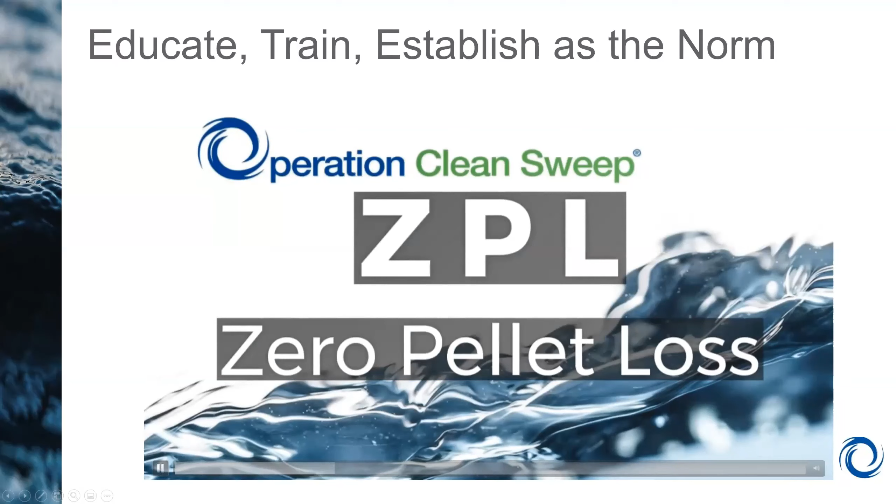This first video, we've got TVs and monitors throughout all of our facilities, and this shows the employees how we address pellets, how we address sustainability. We've got almost 400 TVs through our organization. As an Operation Clean Sweep member and OCS Blue member, we promote all of the principles of Operation Clean Sweep. So we're now on this big zero pellet loss initiative in our company. We've always been about containing pellets and everything, but now we love acronyms, so ZPL, and we're pushing that through.

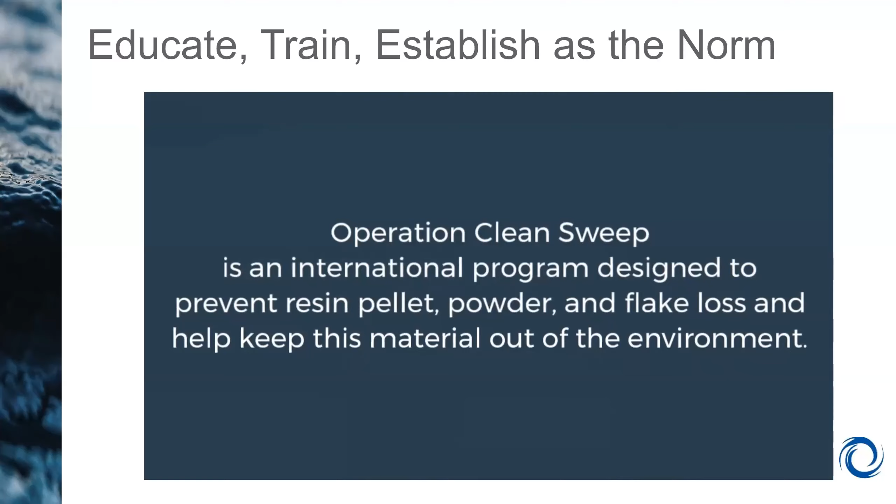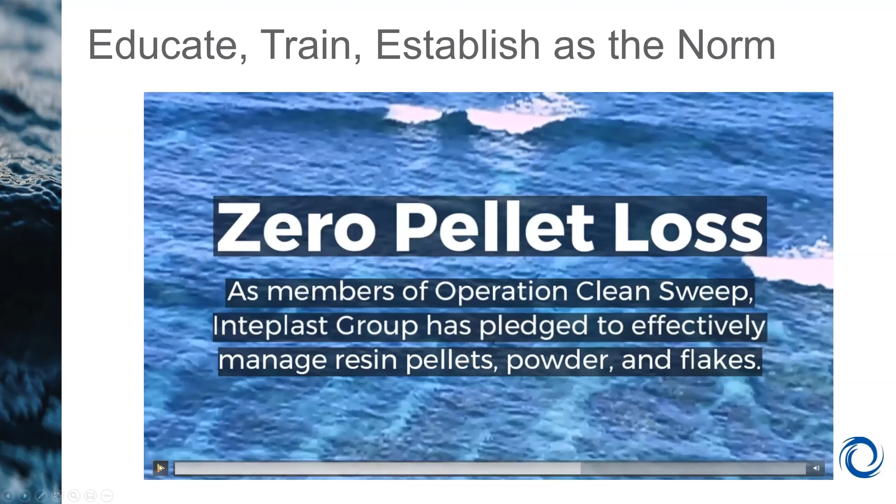This is an easy way for the employees to be exposed to Operation Clean Sweep, to understand that everything should be contained, et cetera. So this was one of our videos, and I'll flip on to the next one.

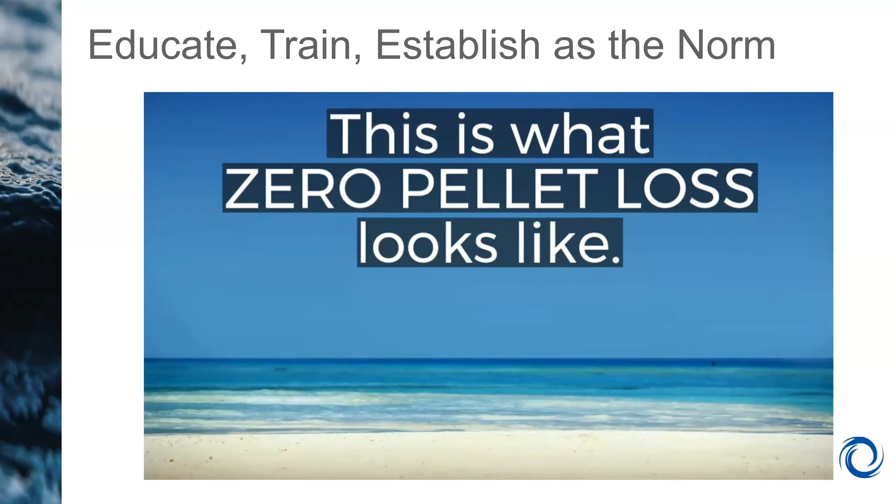This is another one, particularly with all of the issues that are occurring with pellet spills, in the Mississippi just happened, South and North Carolina. There's issues all over the place internationally. This video shows some pleasant scenes of what our beaches, waterways, oceans, what Mother Nature should look like.

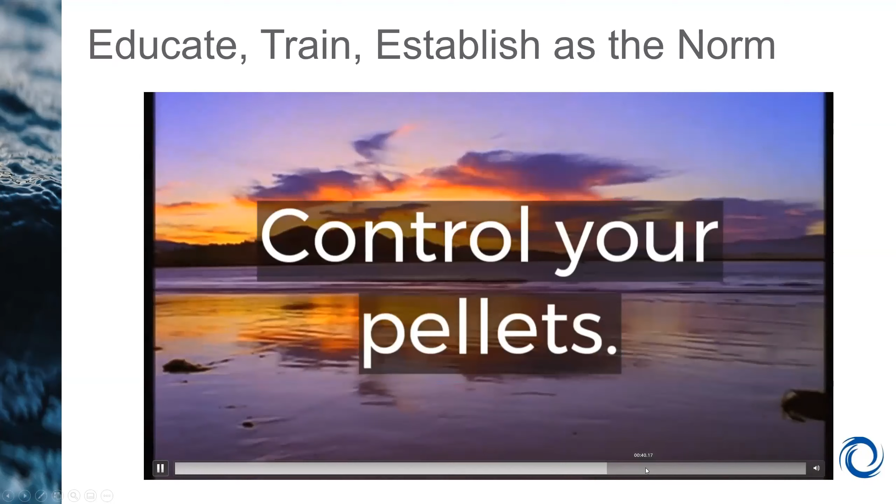And we tie that immediately to the pellet. Are we doing what we're supposed to be doing in terms of managing pellets and managing waste in general, but specifically where we hone in on this concept of zero pellet loss. It runs through and controls your pellets. So zero pellet loss, that's what we're preaching to every single one of our employees.

What's great is from our number one person in our company all the way through to every single employee, over 7,000 strong, they get to see this content. My perspective is we just can't tell an employee, clean up that resin spill, and expect them to do it. It needs to be a constant message, and they need to understand why the pellet should be cleaned up.

So we even put PowerPoints up for our employees. Why strive for zero pellet, flake, and powder loss? It's good for the environment, it is the law, and it promotes safety and saves costs. There's some really no-brainer reasons why we want to go this direction.

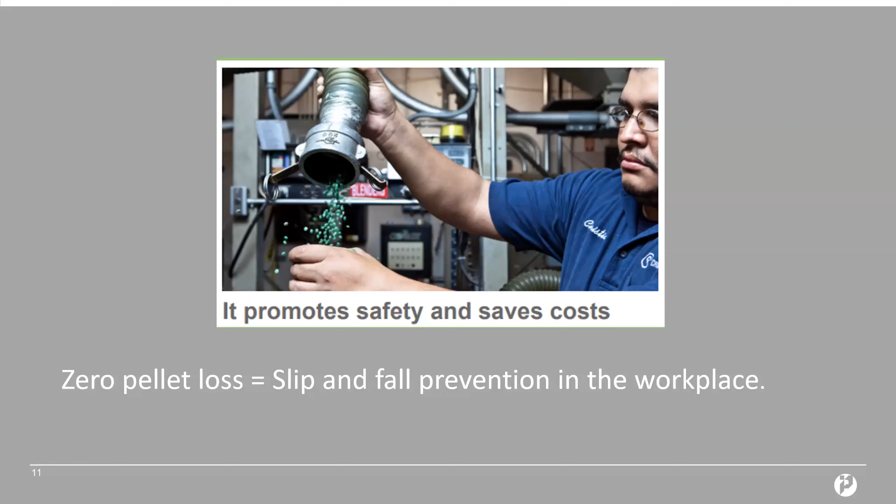So even for safety, from a slip and fall prevention standpoint - when you're doing the right thing with pellets, you're taking care of your assets, you're taking care of the environment, you're taking care of your employees, you're addressing safety. There's literally no reason why an organization would push back against a program that promotes pellet control. So anyway, we put that information up there.

I wanted to set the tone with that information and encourage everyone listening and watching this presentation to first set the culture. Everybody's familiar with safety culture or business culture, but there is a sustainability culture. And drilling down a little bit further, there's a pellet culture, and you literally have to establish that pellet culture, particularly as everything changes right now.

The pellet was not viewed in such a detailed manner as it is today. For many years, it was wherever the pellet was internationally. Now you see the spills that have occurred and the attention, even moving to zero pellets on stormwater and wastewater and everything. This is really, really important stuff, and everybody's got to establish that tone first, then start drilling down and establishing procedures.

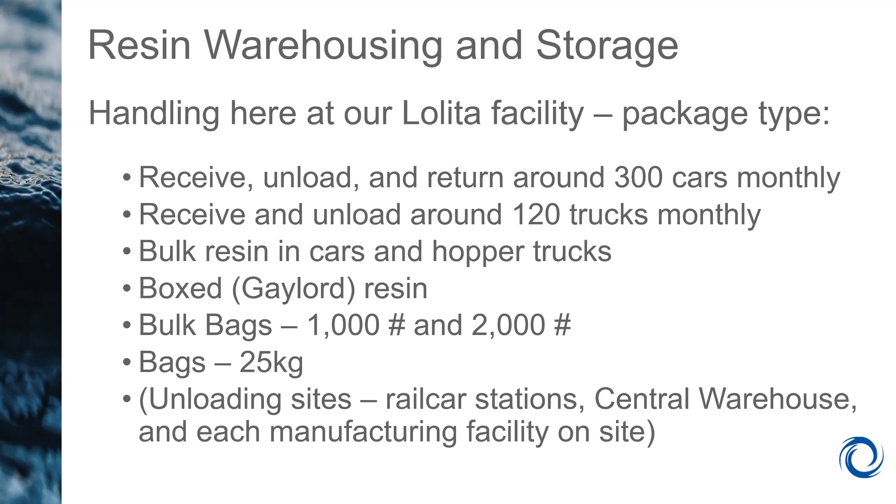The bulk bags are multiple sizes. This slide is just to let you know that you need to understand how to treat each one of these instances differently so that you don't wind up with a situation with pellets. The blanket over all of this is that zero pellet loss is the mantra. Zero pellet loss. That really helps us as we go along.

Our storage methods: around 10 storage facilities, well over 100 silos. We've got conventional racking, which produces some issues for pellet storage. And then also automated warehouse storage, which is an animal unto itself, because if your Gaylord or your bag isn't set up properly, you're going to have a complete disaster in the automated warehouse. It's computer controlled, robots, et cetera. And if you've got a leaking bag or a leaking box, there aren't necessarily any eyes on it. So there are many principles you have to establish even for automated warehouse storage.

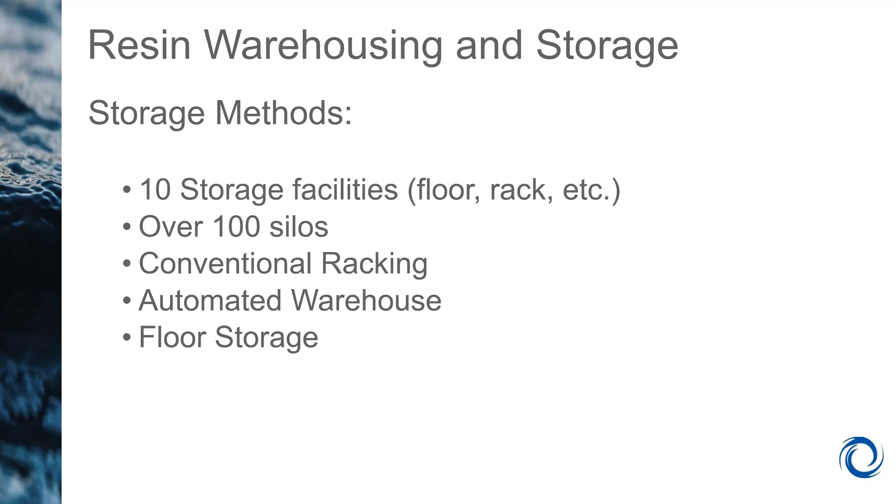And then we've got good old floor storage. Everybody has it. A lot of times we take floor storage as no big deal, like just put 40,000 pounds over here and stack it however. We don't do that anymore. There is a science, there is a method we've got to follow, even for floor storage. You'd think just go throw in double stacks and call it good, but we'll cover a little bit of that. Those are our storage methods.

So our handling or unloading of resin at any point in time—what I love is that in many ways we don't treat it differently than any other item that central warehouse or material control handles. We still apply the same concepts, because what's important to resin is important to everything else. Whether it's motors, earplugs, cleaning supplies, whatever it might be, we've got 15,000 line items in stock. Whatever the item might be, we have these basic principles that just carry right over automatically to resin. It's a pretty commonsensical approach to take.

So of course you handle it safely. Never would we want to do or have an employee do anything unsafe. Whether that's a 1,000-pound motor or a 1,000-pound box of resin, we apply all of our safety principles to it. And we don't damage things. Can you imagine if we brought in that motor and dropped it or put the fork right through it? That's an asset, and we just can't be wasting money like that. So it's the same principle.

We take care of a box or a bag or a rail car of resin, and it's fully accounted for. So if the vendor says there were 5 motors on that pallet and here's your packing slip, we treat the motors—which could be $10,000 motors—equally as a pound of resin that can go anywhere from 40 cents to $10 a pound, depending on what it is. We treat it the same exact way, where it's always fully accounted for, locations, in good shape, and we've got control measures in place for quality.

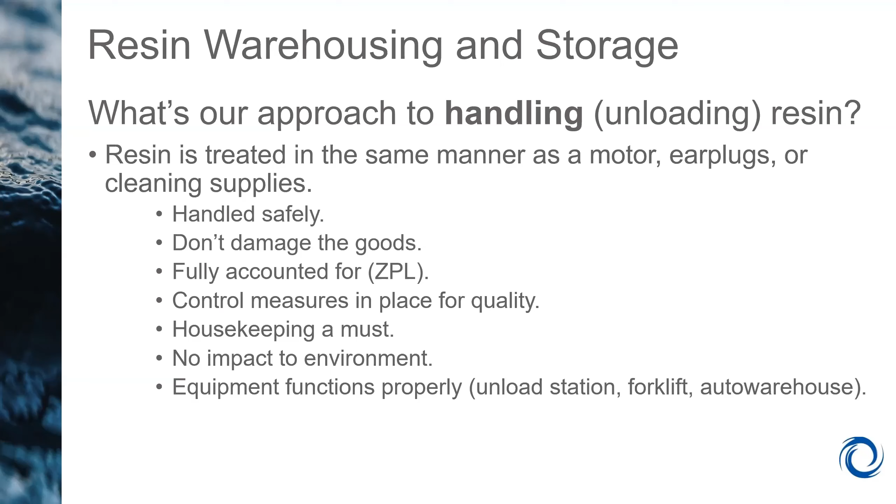So again, through this webinar, this opportunity, I'm trying to really hammer home that it's a culture. And on top of that culture, we treat resin in a very careful way, just like everything else we do. By applying those principles, we wind up with a pretty good program for handling resin.

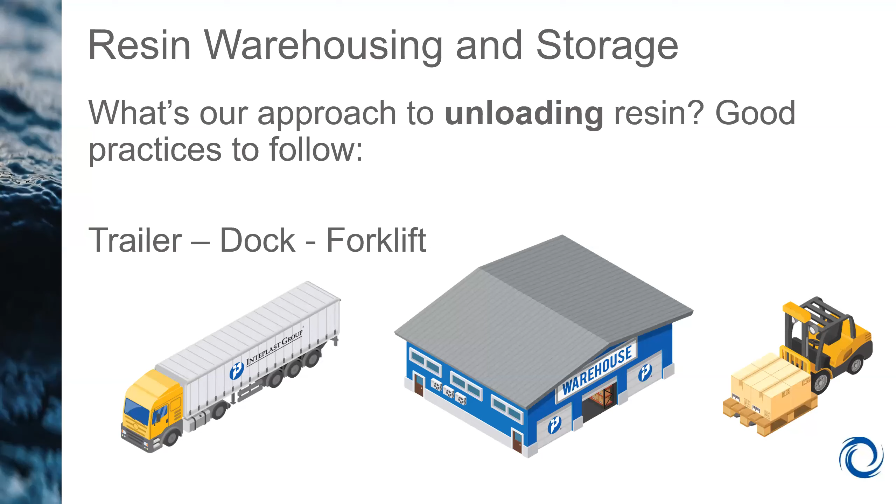So everybody has the traditional trailer dock and forklift setup, and we're going to look at that a little bit. Sometimes trailers will be backed up and we'll open up the doors, and we've got bags that are already leaning against the doors - a near major incident. So use caution when opening trailer doors.

And of course, safety first. Pellet control is obviously incredibly important, but safety first. So just like if we were opening up a trailer full of packaging supplies, we're going to be opening up this trailer that has 1,000-pound boxes that may have shifted during transportation. So be very, very careful about that.

No leaking containers. Obviously, if you've got a leak, don't move it. I would call the carrier, I would call the shipper, see how you can best handle it. If it's something you can manage, go ahead and take care of it.

Make sure you already have your storage location and your plan for how it's going to be stored, because there are two different things - you have storage location, then storage plan. Make sure you have that nailed down while that truck is backing up, or however you're receiving the material, because you don't want to arbitrarily place material anywhere in a facility and then have to move it again. Every time you move something, you're going to have a potential for a spill.

Use the correct equipment to unload. That sounds like a little bit of a silly statement, but I've seen some crazy things over 30 plus years. So use the correct equipment to unload the resin.

Be certain that your forks are set appropriately. I used to drive a forklift - I laugh with my team that I'm still the best forklift operator around, but I've probably lost that touch. I know many forklift operators who don't get off the forklift to examine their forks relative to the spacing on the pallet, and sure enough, before you know it, they break the pallet, the Gaylord winds up with a leak, et cetera.

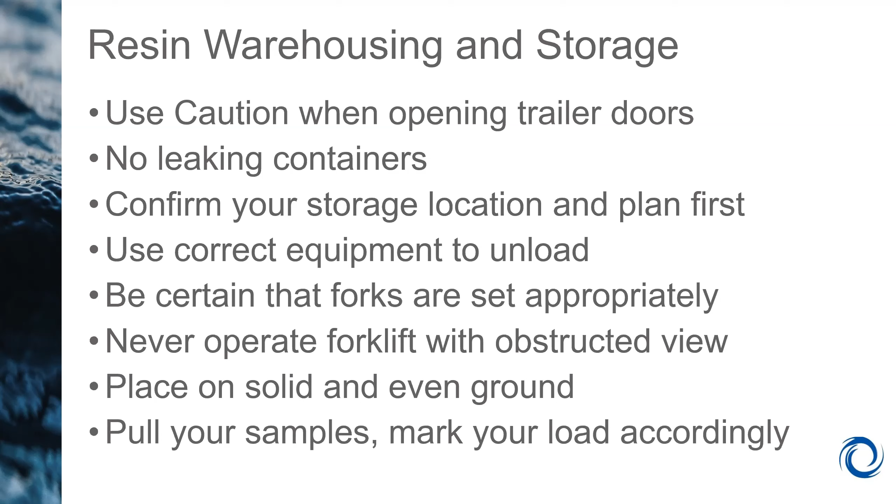Very, very important: never, never operate a forklift with an obstructed view. So if you're handling double stacks or a super sack, everybody should know this principle with forklift operations - if you can't see moving forward with full sight, then you have to go in reverse. That's another topic, but just don't forget that. And then obviously place on solid and even ground, pull your samples, and make sure your load is marked properly.

So for storing resin, a lot of the same thing. We store it just like we store our other commodities, spare parts, and packaging supplies in stock. Handle it safely, make sure it is clearly identified. If you put it up and you can't see the content labels, you've just made a mistake.

Make sure that the containment item is in acceptable condition, whether that's a super sack, 1,000-pound sack, or a Gaylord, whatever it might be. Make sure that the condition of that unit is in good shape. And then make sure that based on the type of material and the particular storage conditions, you're storing it correctly - you've got stacking requirements, rack weights. We've seen instances at some places where rack weights were exceeded. Can't do it with resin.

Make sure nothing is leaking. Because remember, Operation Clean Sweep is no pellet loss. If there's a leak, stop it immediately and then dispose of it properly. So we deploy that principle. Sure, leaks are going to occur, but our team knows, oh no, that's not a good situation - fix it.

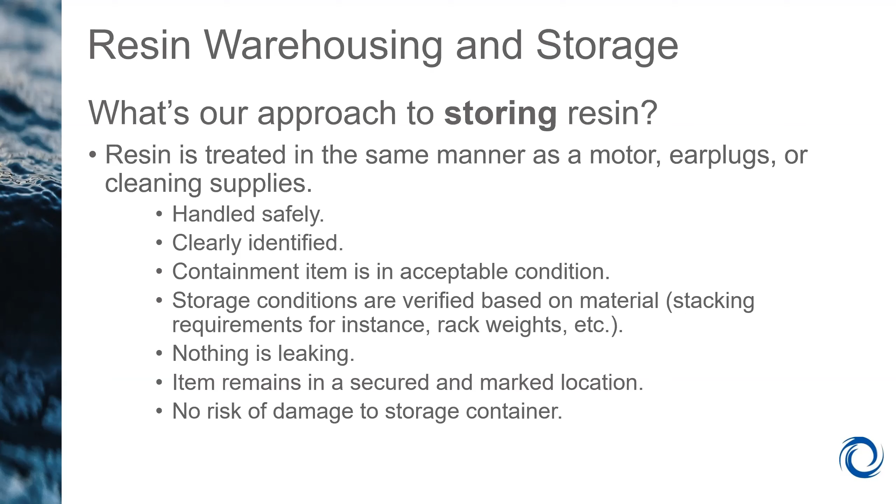And then they fix it, and then they dispose. If we did have any leakage, we will dispose of the resin, or be able to use it as long as it's in good shape. So make sure the items remain in a secured, marked location with no risk of damage to the storage containers.

For floor storage in general, make sure the weather is not a factor. Some folks literally store resin outside. I've seen it at different customer visits, and that is not conducive to a good situation. Particularly, the bags will deteriorate, and the Gaylord boxes will immediately absorb the moisture in the air. They will begin to deteriorate, and before you know it, you'll have a spill. So we strongly advise against any outdoor storage for resin.

Stack according to the packaging instructions. Most vendors will indicate how to stack it. If they don't, you've got to use your best practices in-house. Again, follow all your safety protocol, make sure the load is stable with no chance of leaning. You'll have a massive spill if the top Gaylord falls off the lower one, but you also run a terrible risk from a safety perspective. So be very careful about that.

Leave at least a 2-foot aisle in between the rows of products. I have a little diagram I'll show in a minute. With two rows of product adjacent to each other, leave the aisle space. Don't stack product on the edge of a space where common traffic areas exist. If you have a very high traffic area with personnel or forklifts, don't go close to that with double stacks. You're just asking for trouble, so stay away from that area.

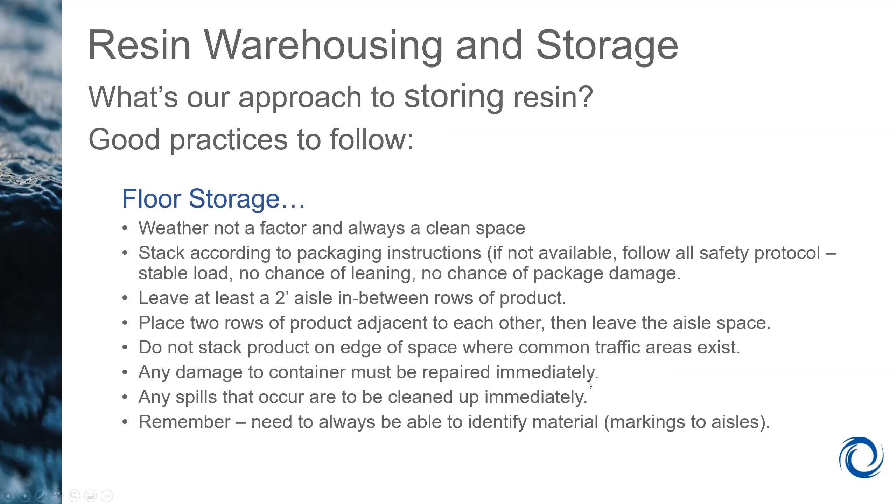Damage to containers must be repaired immediately, no ifs, ands, or buts. Our employees now know that if they see something leaking, they fix it. Any spills we may see are also cleaned up immediately. And remember, always be able to identify the material for easy tracking.

So a very high-level look at this, but this is a typical arrangement we do. If we can pyramid stack, we call it a 2x2+1. You see the little orange dots - that's just indicating where you should have identification markers on your storage units. This is the 2-foot aisle right in between, so as you're taking inventory you have a good 2-foot aisle space, and you can see the markings on all the storage units.

A little bit different is 3x2+2: we'll go 3 on the floor, double stack, and 2 up top. You can do that also, but the same principle applies - leave all your markings on the aisle so that works out okay. Again, do not exceed the storage instructions indicated on the packaging unit.

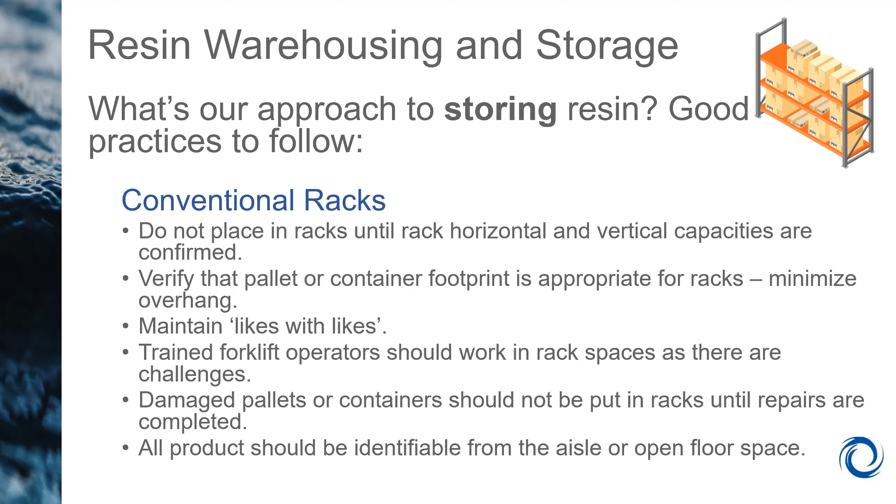Again, obviously, if a pallet is damaged or the container's damaged, don't put it in the rack - make sure it's fixed, then put it up. No problem. And make sure that from the floor space, everything is identifiable, either with your barcode scanner or by the eye, whatever the case is, so that during inventory or when you're hunting down materials, you can find it.

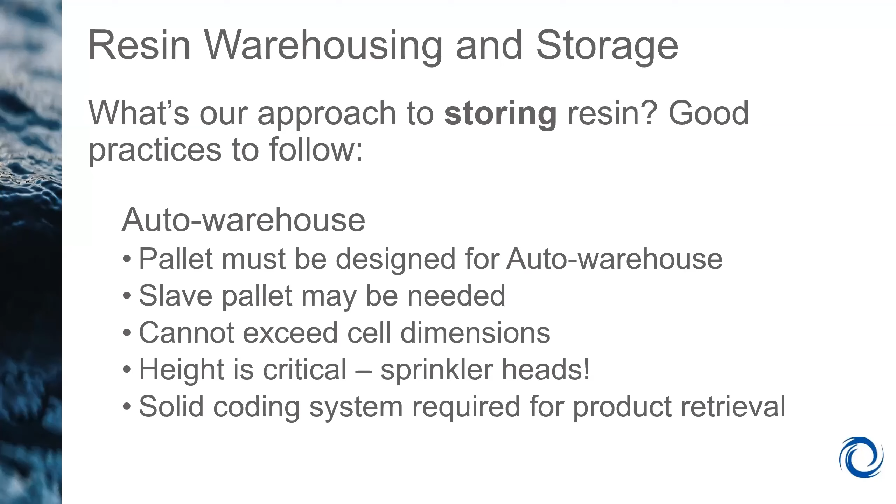We'll move on to the next slide.

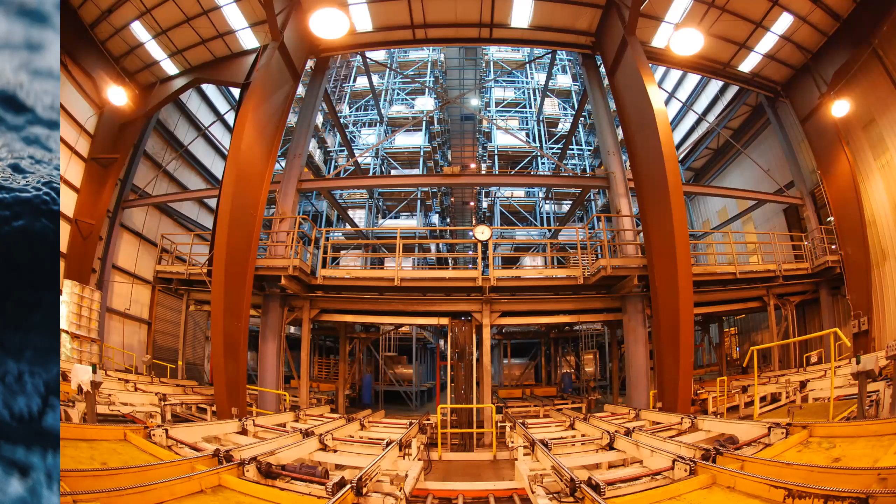For auto warehouse, very similar storage requirements in auto warehouse. This is a pretty cool shot of our auto warehouse with a nice fisheye lens. It's quite a neat experience to work in that auto warehouse, and you can see how high it goes, and we've got robots working in there. So you can imagine if you failed to put up a pallet of goods, whether it be product, resin, or packaging supplies, into that auto warehouse, it needs to be perfect. So hopefully any of you that do have auto warehouses are managing that at point of entry. Don't let a pallet with an issue go into that auto warehouse.

On silos, obviously make sure the right car goes to the right silo. All hoses and equipment must be fully serviceable. We've had an instance or two where the old hose coupling blew out, and that unloading pump still blew some resin, and we had a mess to clean up, no doubt. So stay on top of all your silo related and conveyance equipment, doing routine PMs, changing out couplings, whatever it might be, making sure bolts are tight, etc.

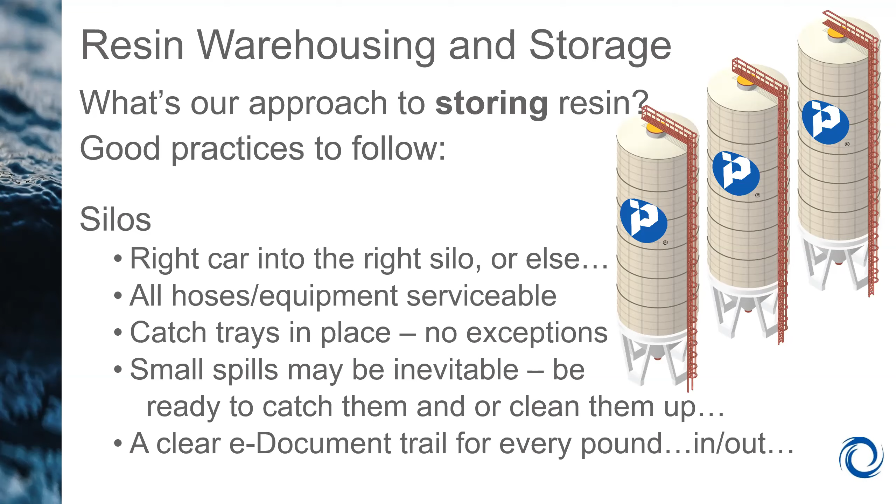And of course at the rail car, it's a different scenario there, but make sure you're using catch pans at the rail car. There's no reason for a pellet to hit the ground. We know that unloading, or connecting and disconnecting hoses, creates an issue or the opportunity for a leak, but make sure you've got that under control. And then with your silos, cone inspections, coupling replacement, filter bag maintenance, and be inspecting your welds. It's very, very important that you stay on top of that.

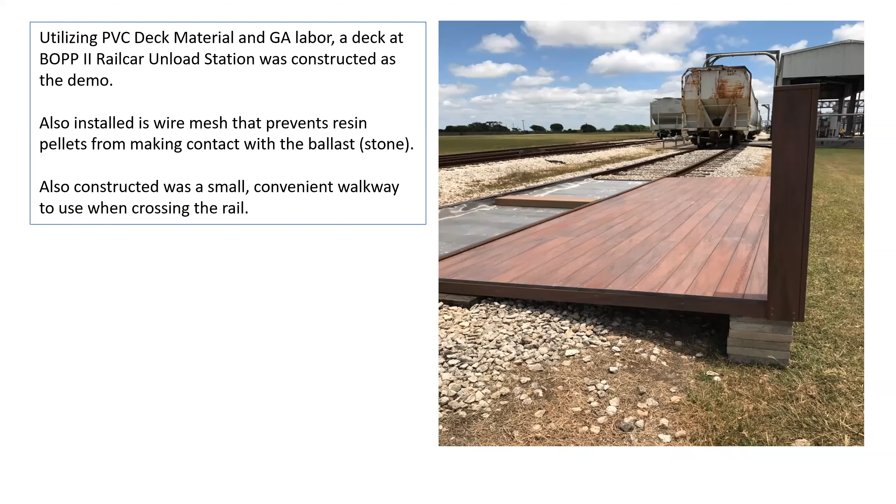This is a little illustration. We did this at some of our unload stations. One of the products that we make is PVC decking. So we built a deck, and that is tongue and groove, so pellets cannot go through it. And then we applied this fine mesh to the track where we'll have an unload. The connection to the car comes over this area. And if we have a spill, not too often, but if the pellets do come loose, we will simply just vacuum them immediately right off of either the stainless steel mesh or the deck. It has worked very well.

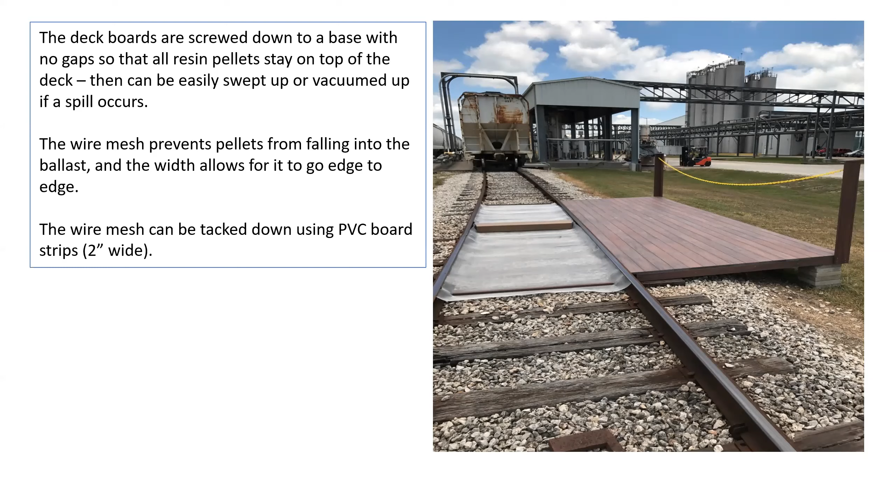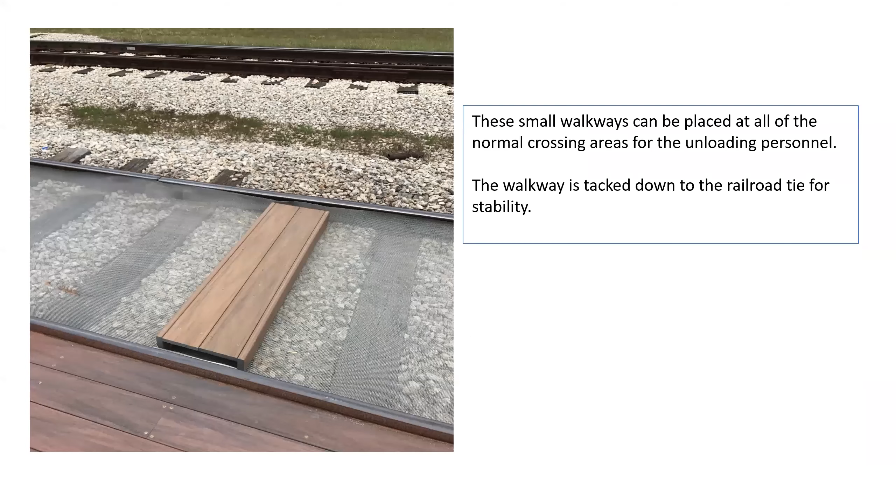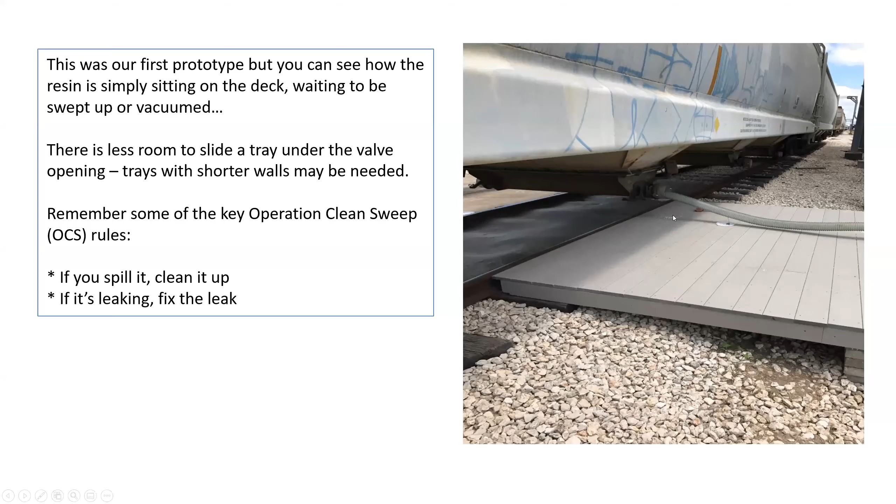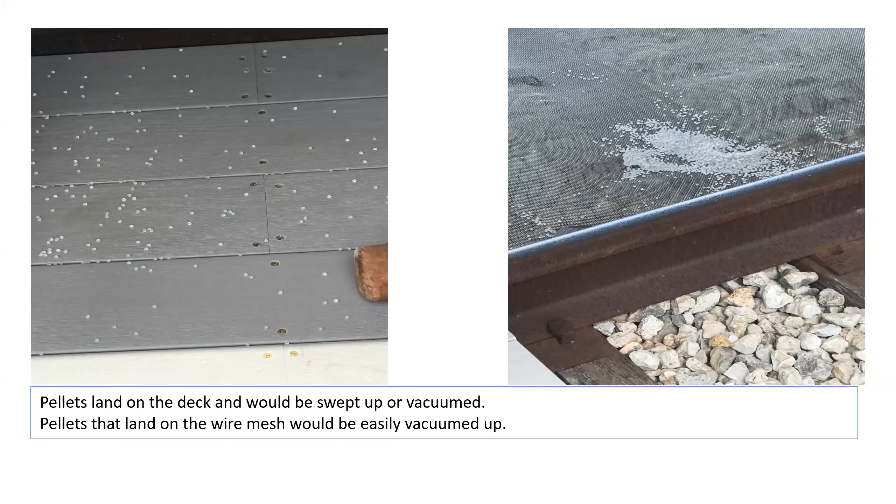It's a good opportunity. We know that a lot of facilities, unfortunately, use ballast at the storage area. Preferably, we would not have ballast in these areas. We built a little walkway for the unload operators to walk safely across the track area. And then you can see there's the application, there's one of the decks. Hose is connected, you can see a few pellets right below, and the operator will simply vacuum them up. We've got a nice vacuum unit that works both ways. Either you blow the pellets to a cleanup area, or you can vacuum up the pellets very easily.

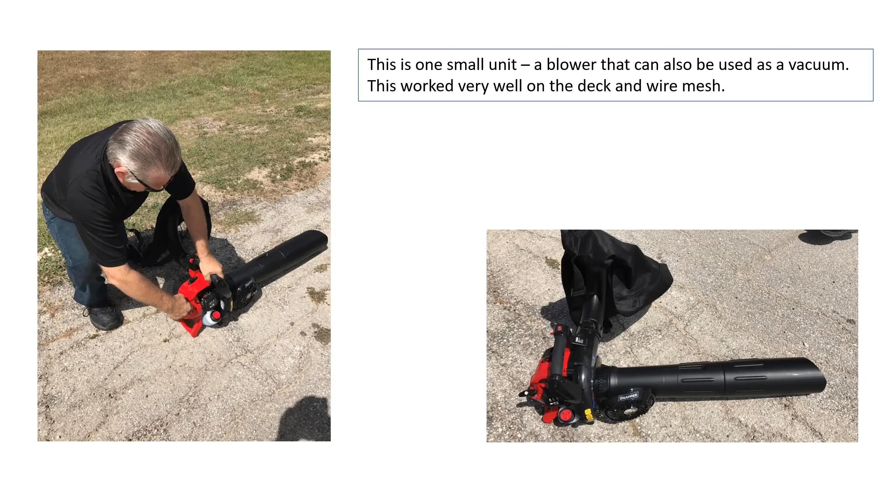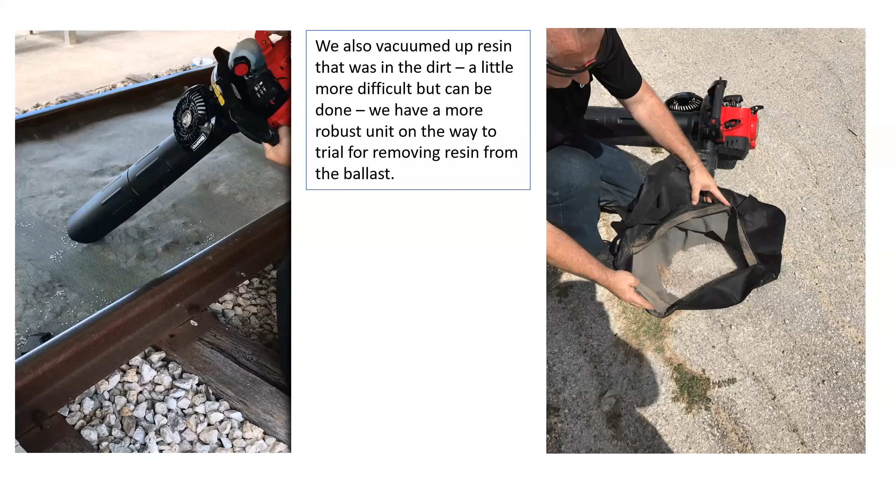So we got a little bit creative. Some other folks have done that. There's 30 different ways to contain and make it easier for cleanup, but certainly we need to focus that way. Here's our good friend Kazi. We worked together on this project and getting the vacuum ready. It's a blower, but turn it opposite direction and you can vacuum up the pellets. So anyway, that's just something for you guys to be thinking about. It would be interesting to pursue that on your side.

That's how easy it is. The pellets don't go into the gravel. We just vacuum them up, dispose of them properly. Sometimes if the pellets are still in great shape, we can send them over to Reclaim. Reclaim can do their wash program, and then we can reuse the pellets. Otherwise, we of course dispose of them properly, and fortunately, we don't have any.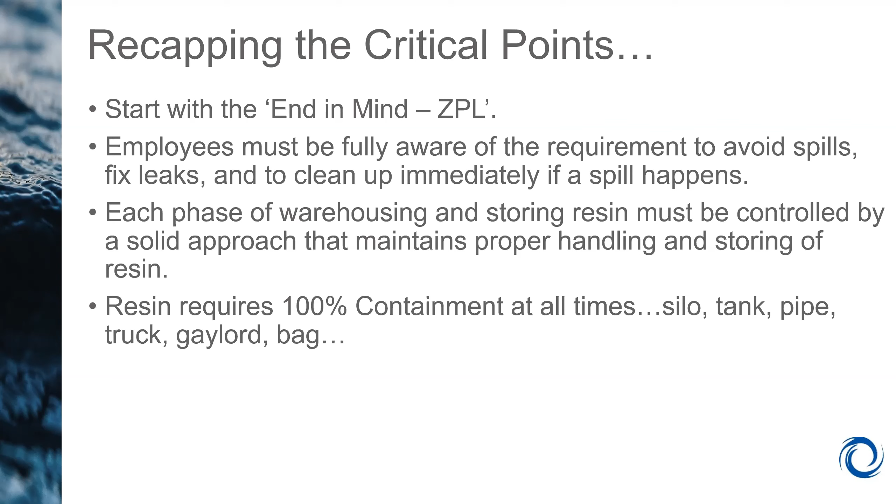So the critical points, and I'm just about done: start with the end in mind, zero pellet loss. Get your employees hooked up on that concept, and it will be an awesome approach to taking care of the principles of Operation Clean Sweep. They've got to be fully aware of the requirements: avoid the spill, fix the leak, clean up immediately. Each phase of warehousing and storing resin must be controlled. And then what I love, the concept is 100% containment. If you can get your employees to imagine never having a pellet uncontained, that's what we always talk to them first. And it's a neat concept. So zero pellet loss to everybody, no exceptions.

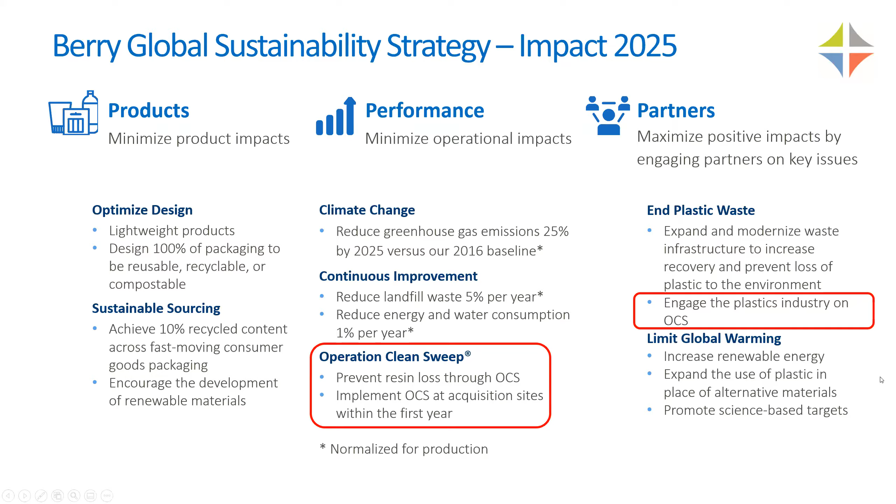So one of the first things I want to really dig into is the awareness point, and this is something that Dan mentioned as well. Resin itself is fairly innocuous, right? It's not a hazardous chemical. It's safe. You can touch it with your bare skin.

So really the first step is that awareness of, hey, listen, despite the fact that resin is relatively innocuous itself, we have to commit to not lose this resin. We have to prevent it from leaking. And anyone listening to this - I haven't personally unloaded a rail car, but I've been there while they've unloaded rail cars. I'm not trained in that.

Safety first. It's really easy to spill resin, quite frankly. It's coming out with typically a pretty high velocity. It bounces. They're small. They can get everywhere. I found resin pellets in my lifetime - I found resin pellets in weird places.

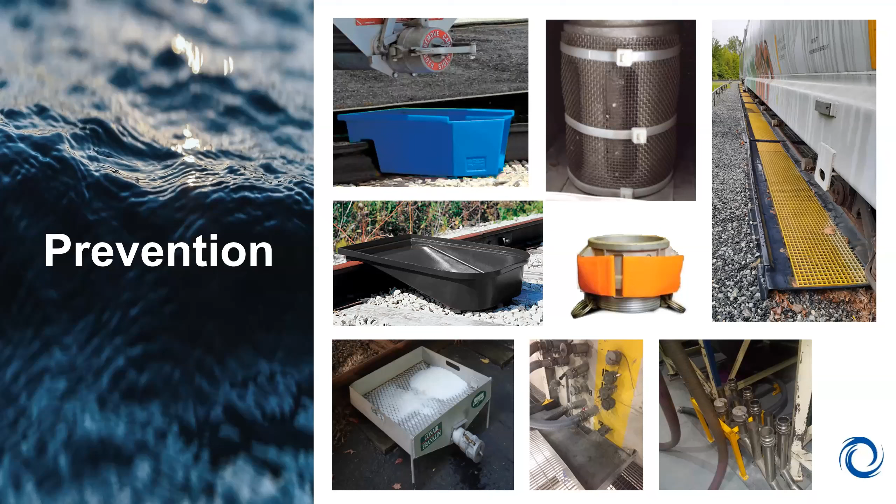Then next, I'd like to talk about prevention, right? So prevention, obviously key. They say an ounce of prevention is worth a pound of cure, and I 100% believe that. We would much rather prevent the resin from spilling than have to clean it up. Let's assume that whenever we have to clean up, we're not going to get 100%, and that's why I want to avoid cleanup.

And here's a wide range of some of those best practices we've shared. You could say that some of these aren't necessarily prevention, but containment. But regardless, when we're unloading, we primarily, in North America, deal with resin in rail cars. In Europe, it's primarily in bulk truck. So we have those different things already.

But from the rail cars, we have a wide variety of pans or catch pans, et cetera, that people use to try to prevent that resin from spilling. A wide variety, as you can see on the left. That top right image is really one of my favorites - I really enjoyed that one. We've used this one before, so you may have seen that image before. They actually put in this track to basically say, you know what, we don't want to rely just on the pan. We're going to put in this track that represents a secondary containment.

A couple things I want to also point out on this slide. This top middle image is a silo probe screen. And one of our kind of issues that we found - and we'll talk about this a little bit more on the reporting side - but when you have a spill and you look at the root cause, these silo probe screens can wear out. You'll notice this is a probe screen that we installed. The initial one, the standard one, the stock one, is quite frankly a very thin, very flimsy screen that over time resin will wear out and wear a hole in. We've experienced this multiple times at multiple sites.

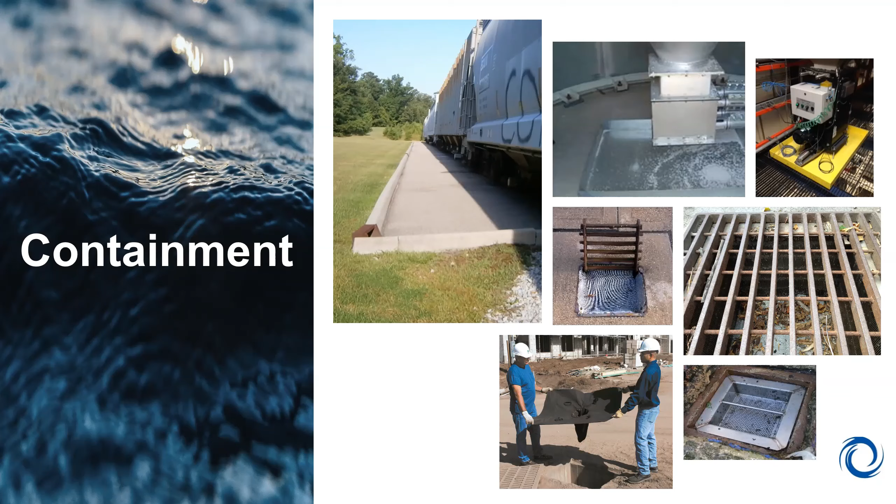And so the auditing, expect what you inspect. I thought Don Graham was the first person to ever say that, because he was the first person I ever heard say it, and I thought it was a great quote. Apparently everyone that's ever worked in manufacturing has heard a quote similar to that, so it probably wasn't a Don Graham quote, but ultimately, you need data, right?

If you have data on many spills, you're going to see which ones occur more often, and then you're going to start getting into root cause analysis. It all comes down to data. If we say, hey, don't spill resin, but we never check, we don't know if we're spilling resin. We have to audit, we have to check.

We really encourage sites, in general, if you're working in manufacturing, probably someone at that plant is tasked specifically with doing a walkthrough for that day. That's generally been my experience in manufacturing. Include high-risk areas as part of your daily walkthroughs. And if you don't know where high-risk areas are, your daily walkthroughs will tell you, right? Like, where do you see resin? If this is a brand new program for you, you will know pretty quickly where the resin comes from.

If you've implemented it and are trying to take it to the next level, obviously that can be a little more difficult. But I strongly recommend auditing these high-risk areas as well as accumulation areas, and then tracking those results and really putting data to it to understand, one, the potential leak sources, and two, how to address those.

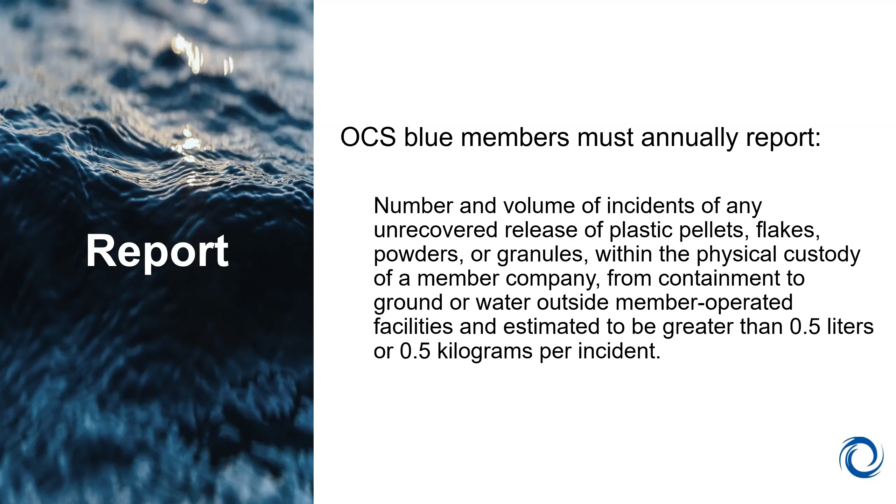And then reporting. Once again, with the data - audit to make sure the data is accurate, and then with the reporting, that's where you get the data. With OCS Blue, basically there is a reporting requirement, and we encourage all of our sites - we have an internal system that we ask all of our sites to report any resin spills in. But reporting is critical, right? Just like with auditing, it's expect what you inspect. You need that data to drive good decision making.

And then share. One of the reasons I said yes immediately when they offered me the opportunity to join this webinar, as well as anything - I've generally said yes to everything regarding Operation Clean Sweep, because it is pre-competitive. If my competitor is spilling resin, I don't want to get into that, I guess, but it's pre-competitive. We should all work with each other. It really is in all of our best interest to work together.

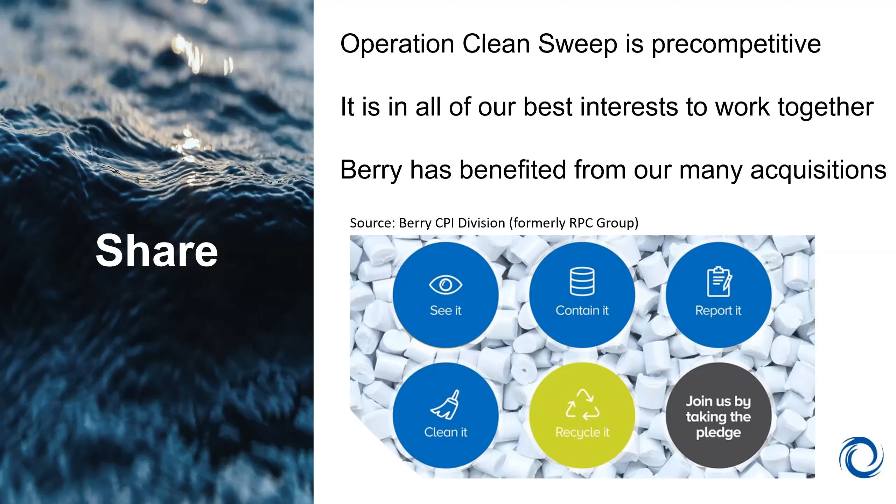And that sharing is, as I alluded to earlier, one of the ways that Berry has benefited from our acquisitions. We've had a lot of acquisitions, and some have had really great learnings and best practices. So this diagram here is actually from when we acquired RPC Group, which is now largely our Consumer Packaging International division. As I said, they were very active on Operation Clean Sweep, so they had a lot of these great resources that we were able to leverage and pull in.

All right, and then obviously cleanup is very important. Ideally, if you followed the previous steps, you don't have to clean up, but especially if you're new to a program, you might have some old historical resin spills, getting back especially to the rocks I mentioned on the rail siding. You really need to have a clean base to start from, so you can very clearly say, nope, that's new resin - and that new resin should stick out like a sore thumb. Everyone should see it and be embarrassed and want it cleaned up right away. Whereas if there's a big mess, you just add it to the big mess, right? That's one of the important aspects for cleanup.

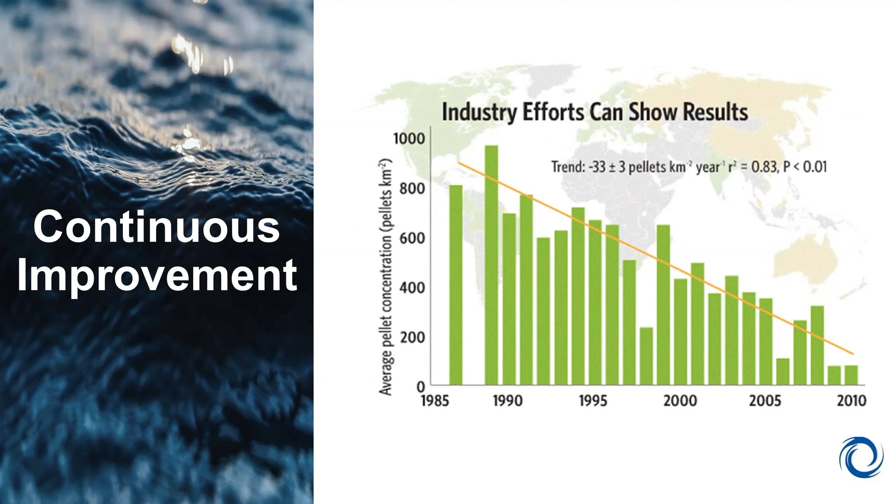So in summary, the plastics industry can and should prevent resin loss. Thank you.